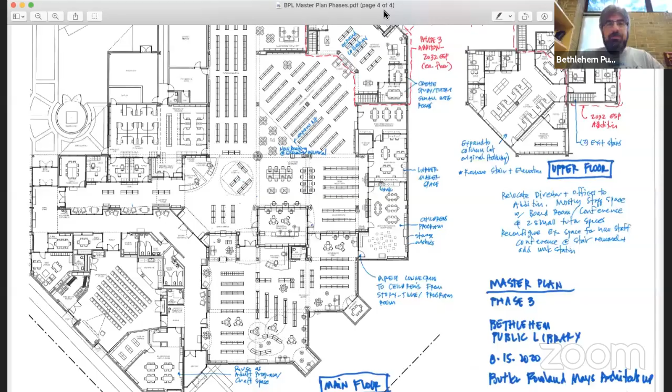Great, so Lisa's going to walk us through, and just briefly, I think you've had a chance to look at these for a few days, and probably had a sense of what they were even before that, because they're versions of where we were previously. But just very quickly, let's talk about the entry. This is the main floor, and we'll start with the sheet, which is the existing conditions.

Anything to say here, Paul? Oh, sorry, Michelle. I did have a question.

The scheme that we're looking at right now, this is the one with the minimal change. Is that correct? Well, phase one of this scheme is the minimal change.

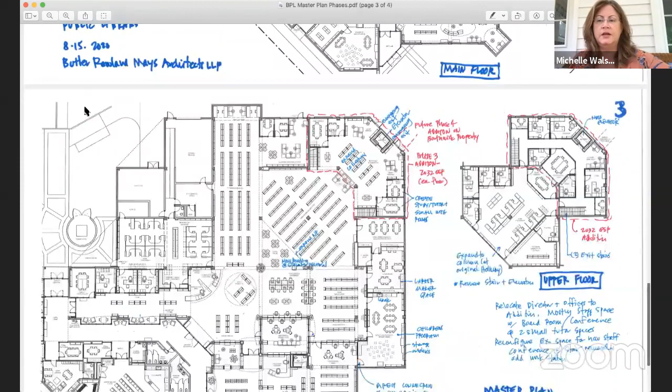That's right. Okay, I'm a little confused on what exactly we're looking at. Are we looking at scheme 1, scheme 2, scheme 3? I understand these are phases, but the end result is going to be which of the prior schemes we've discussed? What we've done is consolidated all the comments for all the prior schemes into one master plan that has multiple phases. So if you were doing an absolute minimal, we don't want to change the footprint, we just want to redo the inside, that's just phase one of this scheme.

Gotcha. Phase two, if you decide to do the addition, for example, that adds the meeting room, which is on your screen now, that's something you can do. So essentially, we've gotten away from disparate schemes into a single consolidated scheme that has multiple phases, and you can stop at any point along the way. We tried to make them so they were all self-sufficient. If you stop after phase one, which is minimal, phase two, which has an addition, phase three, which then gets the most extensive. Does that make sense to you?

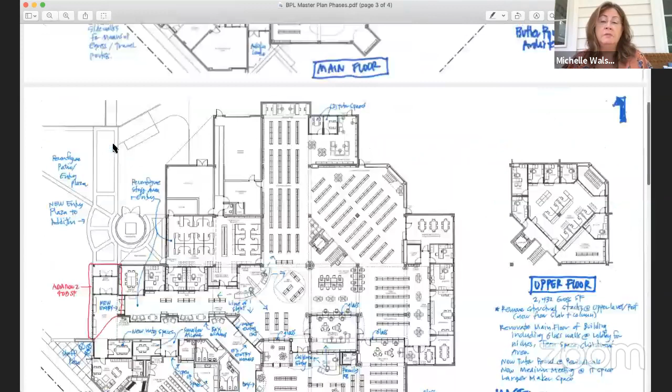Yes, it makes sense. I honestly just did not recall a discussion that we were going to move away from choosing between schemes 1, 2, 3, or 4 way back when. Maybe I missed a step in there, but yes, please continue.

Okay, sorry. These are certainly, we can still modify these if there are things from scheme 2 or 3 or something that you think should be brought back into this. We can see about doing that, but we tried to accommodate all the comments we were getting from those schemes individually to make a single consolidated scheme. But let's see how it works, and if it doesn't, we'll come back to it.

Okay, all right, thanks. So the existing conditions drawing. Anything to comment, please? The only thing that would happen is I started to show where some demolition would happen in order to accommodate the scheme.

So it's sort of minimal demo, except for the main gallery, the brick walls we're going to cut through so that you have a lot more visibility between the lobby space or the gallery space and the rest of the library. And then basically a 400 square foot addition here and 475, 474 addition here. So that's basically the start of phase one.

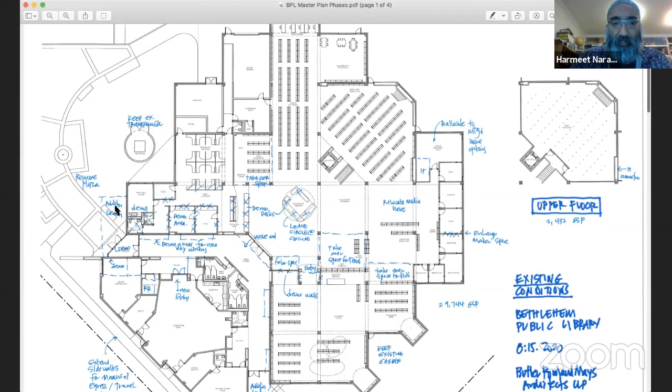Sure, yeah, in fact, when you see it here, we can extend that space here. You can see how we've adjusted the plaza for the straight on entry, and instead of entering here, we're now entering up here, but we could bring it even further. We could connect maybe even to the half round or something like that. But that's easy to do because it doesn't affect any other building systems. It's sort of discrete over on this side.

That was my assumption. Okay, we could do that as a pergola too. Instead of having it actually be built or enclosed space, it could still be covered further out.

Architecturally, a covered walkway that picks up the architecture of the building. You see that at schools a lot where they have bus drop-offs and things like that, where they need a long covered space. I'm not saying we want this to look like a school, but it's integrated into the architecture, not just a tarp strung over a walkway.

Okay, so this is phase one where there are minimal changes to the footprint. So the only changes in phase one are this addition and this little addition down here. So a few hundred square feet.

Originally, we were thinking about doing the upper level stuff, but we've pushed that off to phase three for reasons of scale. Phase one right now is essentially these two small additions that change the entry, and they could get a little larger if we wanted them to, but it's essentially rearranging the interior.

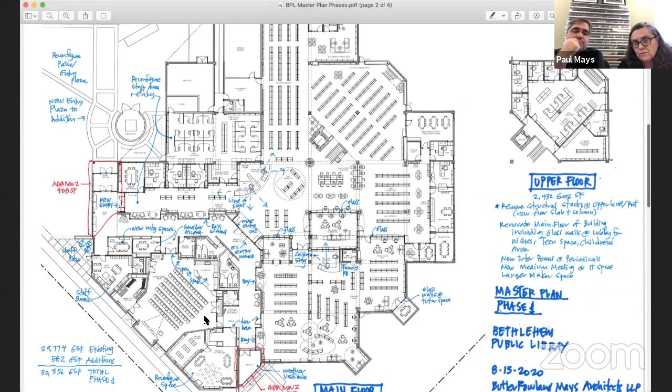And then there's a direct connection that we can have right now between the kids and the story room, or if they need to use the bigger room. When you get to phase three, I've taken over this space so that there is a direct connection between the kids and the story time activity room, and then this could just become an adult meeting room or activity space at that point.

Another one that can be - again, by keeping the gallery here, we keep going back and forth because we don't want to be redundant with space, but we do want a threshold between inside and outside the library proper. But everything outside has to have access to the restrooms and these various meeting rooms. What this means is you have a large meeting room, 2 conference rooms, theoretically even the staff lounge, and in the future this becomes an adult room. There's lots of options for meeting space going forward that don't involve violating the threshold to the library itself.

The other thing I wanted to add is separating the children's room is partly an acoustic question, but it's also a safety question, which we're seeing more and more. Obviously we're trying to address the spread of virus safety questions, but one of the other common questions is about protecting children who either wander off or are led off by, even if it's an adult they know, a non-custodial parent or things like that.

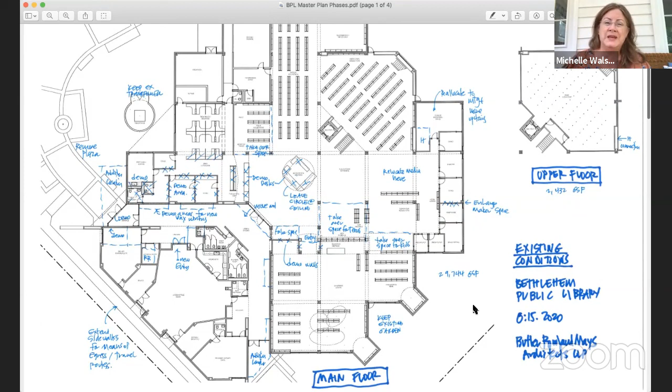Grocery stores were doing that kind of thing long before the pandemic, as far as driving up and receiving your packages to your vehicle. I think it's something the library could consider. I don't know how difficult it would be to draw up a scheme for that, or to add it in at this stage.

No, that wouldn't be too bad. It would involve a phase probably beyond the three we're talking about, but we could move that up in priority if that was something we wanted to do. We just did a drive-through at the Moffat Library in Washingtonville a year or two ago.

And right now, as you say, during the pandemic, they're saying thank goodness we stuck with it. It was a question of whether we wanted to do it or not. They're golden now when it comes to drive-through pickup because they're set up for it.

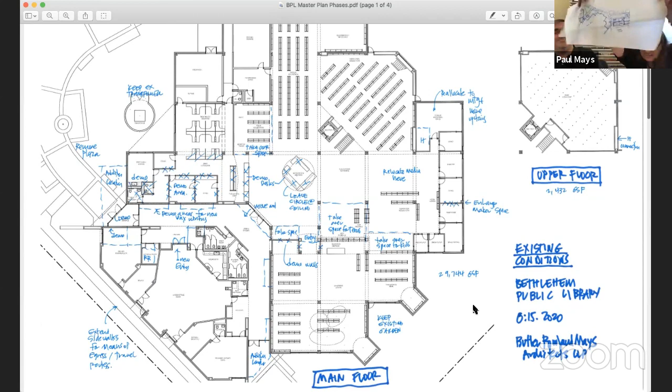But Lisa had started, I don't know if you can see, we started a little scheme of something that could happen on the site, or just straight parking. Because I know the county office across from you sort of steals your spaces, this would be a way for you guys to get more parking over there.

But we could definitely think about having a loop there, a drive-through loop. The trick is we have to loop it so that the left-hand driver's side of the car is on the building side. So it's counterintuitive to the way the rest of the site circulates at the moment, but we're rethinking a lot of that piece anyway.

So Michelle, it's an excellent point. If that's something we want to consider looking at, or as a priority going forward, now's the time to be thinking of it in the master plan and deciding where it makes sense to construct it. Yeah, no, it's a good thought. All right, thank you.

So coming back again, phase one is fairly straightforward. It does get expensive in the sense that it's a large building coming on a half century old, give or take, from the 1970s. So of course I'm a half century old now that I think about it, but having said that, there's a lot to do there.

So the other question mark, and we were just going through this at the Niagara Falls Public Library as well, the building itself isn't exactly built for flexibility because of all the masonry. If there were framed walls and sheetrock, moving things wouldn't be that big a deal. But the architecture of this building has big open spaces, which is great for flexibility, but whenever we want to punch a hole in a wall, it's likely a load-bearing masonry wall in most cases. So we've accommodated that in the numbers as we've looked at it.

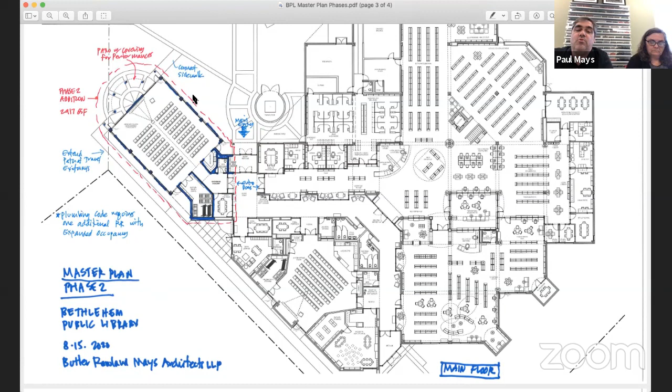Phase two, in its simplest terms, takes phase one, which is already done, and adds a new custom-built meeting room into that area we talked about. Michelle, you were mentioning, what about the earlier schemes?

This was the one, I think we were told that the children's room version we had in one of the schemes probably wasn't desirable. We looked at a few other things, but the one that was desirable was putting a new meeting space here. So that's what this shows.

So here's the entry, or if we extend it up here, here's the entry, whatever it is. But now we've gained this piece. This is relatively simple, and in fact most of this could happen while the library was open, because we can partition this piece off and do this construction without affecting the library itself.

Whereas with the phase one things we were talking about, you would either have to break it into components and work in an area, then work in another area, which we accommodated, but that drives up the expense. It would be easier if you could move out for a few months, but then you're talking temporary space and a cost for that.

But we did see, when the interior of the building was last renovated, there was a very interesting drawing that showed how you move from one space to the next to stay in the building. So it has been done before. We're doing it right now at Guilderland, literally moving the shelves around to make it all happen during construction.

Now, we're showing this as phase two because it's a discrete piece that can be broken out. On the other hand, if you combined phase one and phase two, you could construct this first and then have this as a swing space, essentially moving things into it as you renovate those areas.

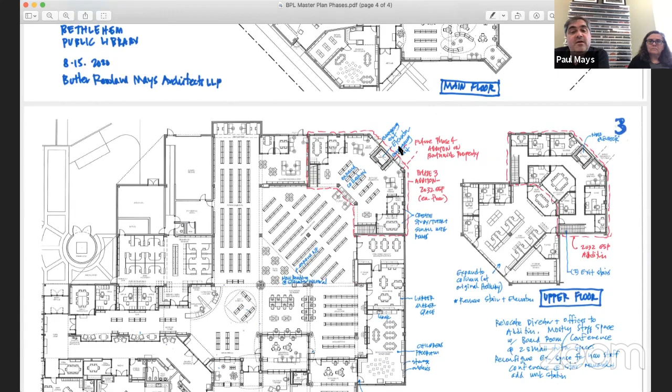Or even, as you were mentioning, the extension of some staff areas and a drive-through pickup and so forth out in this area - or that could be combined into this phase. But at the moment, we're just sort of looking at lots of different options.

But does this all make sense? I should stop there. Two questions: does this all make sense to you? And again, the phasing can be shifted as priorities are determined.

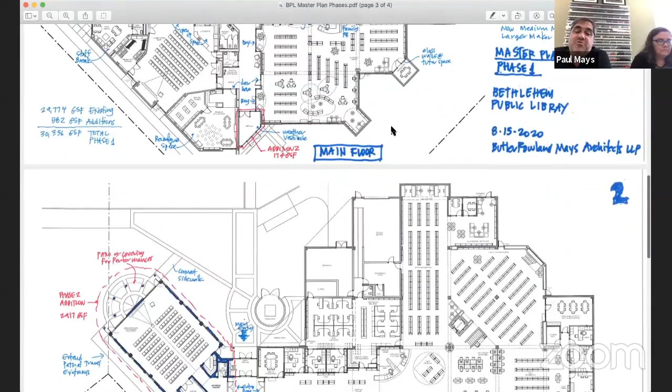But the second question is, is there anything from schemes 1 through 3 point whatever, or 4, that we looked at before that you say wait, we were going to do that and I don't see it anywhere here? I think we picked up most of the priorities and got rid of the things that we didn't like, like the children being out here. But you would be the best judge of that.

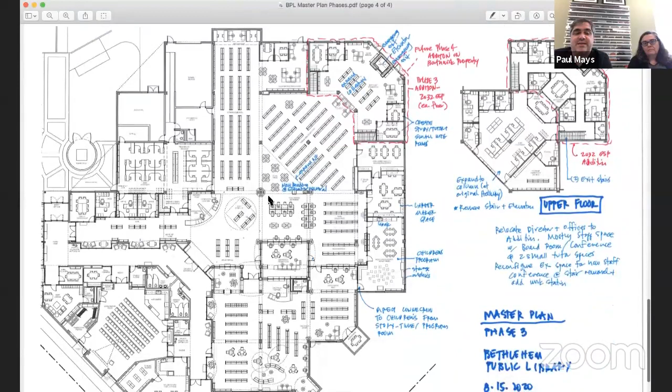Any thoughts? Well, I do notice on scheme 2, and I realize not everyone has this in front of them, but we do have a bump out - you called it addition 1, it looks like, at the very bottom of scheme 3 on your screen now. Down here, have those two little bump outs.

To the left of that, you had a small addition for the studio conference, book sale space is what it was called. Is that area another possibility for a small addition there? Yes, it is - but yes, absolutely.

We can do that. Our thinking was we had started to create so many other spaces, we didn't want to just go forever and keep creating more and more spaces. But that's an option either as part of one of these phases or as a future. Again, at the end of the master plan, we can still say we have future expansion here.

We have future expansion up here too, and opportunities there, in 10 years or whatever. There's still the possibility here to extend too. But the question of what can we do in just the footprint was sort of the catalyst to see if we could get most of what you needed within the footprint of your existing building.

Right, I think that original question was just because we hadn't seen what we could possibly do with the existing footprint, not that we were against those original plans that would extend the property. Well, certainly we can show dashed the creation of spaces where future additions could be. And if it's a priority, we could even start to think through the interiors of those and how they would expand the areas adjacent to them or what would go in them.

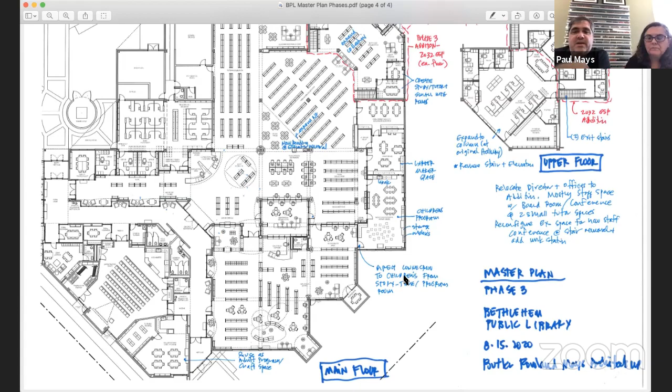Sometimes it's tough to tell if that phase 4 or 5 is going to be at least 10 or 20 years down the road. It can be an exercise in how far do you take it. We have space, we have the opportunity to do something there, but we also have time to think through what may happen with library technology and usage. Certainly the things we're doing now with study rooms, tutor space, and extra meeting spaces are different than they were 10, 20 years ago. So we have the opportunity to roll with things if we know we can expand into those areas later.

But your question, Michelle, is we did sort of a minimal solution here to get a better entrance from Delaware Ave. We could do that in phase 1, to make that some space we think is important to have in that location. Well, we say that, but you're going to see the numbers for the phases too, and there may be a point where you say, oh wait a minute, we have to make this a manageable number.

Of course, there's a lot of variables in play at the moment, and the master plan will try and delineate what all those are, prioritize, and give us a firm direction. I pointed out when we were talking early on, I showed you Kingston, which had like a 6-phase plan. We've rearranged them as we've gone along because different grants became available or a priority came up, so what was originally phase 2 got deferred and we put phase 3 in front of it, and actually did a phase 3.1 afterwards. So the master plan is flexible. There's lots of things we can change. And as you say, if we decide we really do need to add something here, that's easy to do. We know we have the room for it.

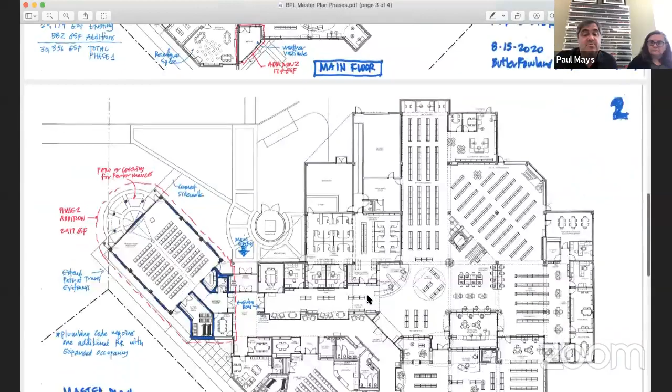Wasn't this a plaza or garden? Yeah, that's the garden, that's staying. So we took out the addition there because we knew that was something important to stay. But as we say, there are other opportunities to add those things back in. And we think this gets you up in terms of square footage—this probably puts us about where I would have expected at the end of phase 3, with still the opportunity to add thousands more square feet in the future.

Anything else you want to cover on this? We can come back to the plans. I see it's 10:44. Wanted to ask a question, yes, Lisa.

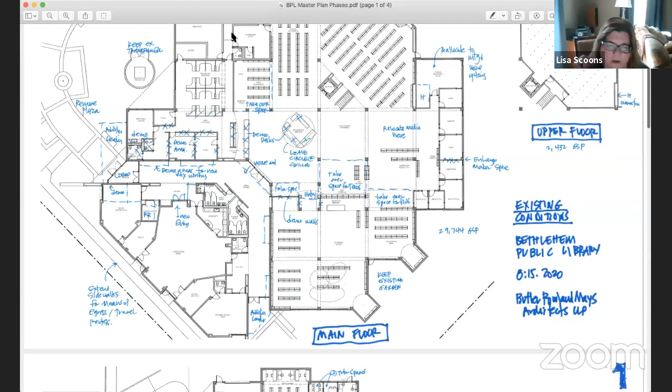About doors. We now would have 3 different entrances into the exterior, here and here. Is that a concern? Jeff, I'm kind of looking to you, because right now we have one... one entrance into the main part of the library. Oh, you only have 1? So we're definitely adding 1. There, but I'm exiting—yeah, this one's just an exit that you wouldn't enter into. We don't want people entering the children's room first.

I didn't mean to cut you off, Jeff. Sorry. No, this one is technically not an entry to the space. It would probably be an alarmed door, as a matter of fact, because it comes off children's. But this one is the existing one, and then we added one here, but both are within easy sight of the main desk.

But Jeff, I defer to you. Do you have thoughts on that? I probably did do some thinking about that before, I have some thoughts on that. Does that make sense? Sure.

Any other questions before we move on? I did have one more question. We had a tour of the library recently, and this question came up about essentially the two hallways we have going in near the main entrance. Yes, that one, and then behind, and this one.

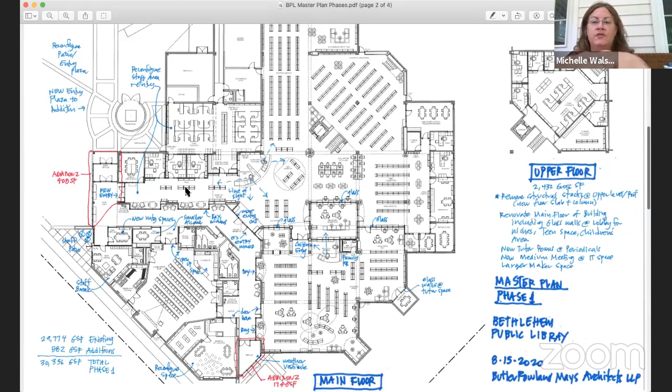I think the idea is to somehow keep the main library separate from this other meeting space area. Correct. But the conversation we had on our tour was there's actually never a time when we have meeting areas open when the library is not. So is there really a need to separate the two?

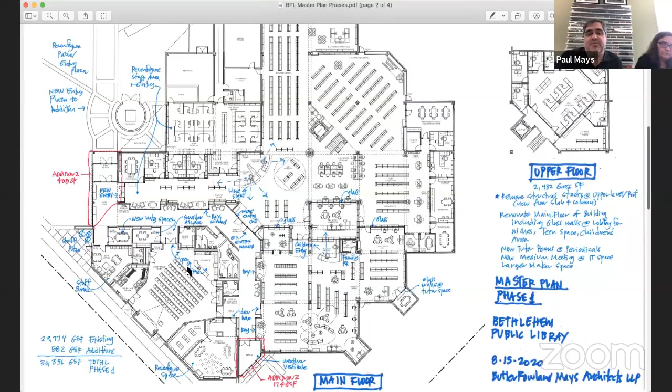I'm going to suggest this. At this phase, I would keep them separated because we want that decision to be a policy decision, not an architecture decision. In other words, you've decided the meeting room is never open unless the library is open. But you do have the option. If things change going forward, you could open one and not the other. I would suggest leaving them separated here, but in phase 2...

Now that you have the option to have this meeting space open, we could close this off here, depending on restroom access. That would be something we'd have to work out. Because right now we're relying on these restrooms, but then this whole thing could be part of the library proper, if that's what you're getting at, Michelle. Yeah, and at that point you'd still have a meeting room that could be separated because of where it is. We'd have to work out restrooms, but that's an opportunity maybe to then break this through, because this is all glass, we've already broken through the walls here.

That's a minimal change between phases 1 and 2. In other words, we put in these niches, but then they just become open. We take the glass out for the next phase, and now all of this is part of the main entry sequence of the library. That's a possibility, because your plumbing is all here and you have a slab on grade, getting plumbing over to these areas is going to mean trenching and so forth, so that's where some of the expense comes in. But that might make sense if you're really looking to get rid of the redundant corridor.

Right, okay, thank you. And I think I mentioned that at our last meeting, we'd like to make that one space, but for now it is important to keep the two separate from our perspective. If you decide as an institution, not just now but as far as we can see into the future, we don't plan on ever having meeting space available when the library is closed, then we can say all right, we'll go from that assumption, and the need for this separation goes away, because then these restrooms are always accessible.

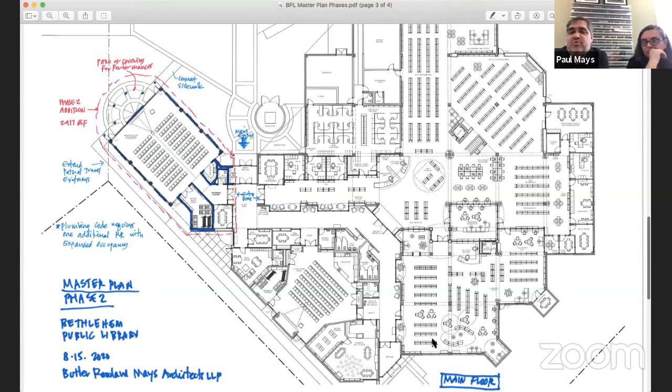Not perfectly, right? So I'm going to stop sharing this screen for a moment, if I could, and go to... bear with me. Occupancy, lineal footage. The lineal footage, very quickly, you'll see in the summary, I think these were sent to you already, right? Yes, I sent them. Oh, am I sharing this? I'm not sharing it yet. Share screen, you have the right one.

Do you have any highlights or thoughts on anything that changed? Did you have a chance to look at that, Jeff? I did. Collections and so forth.

Did you have concerns? Not yet. I would want to look at it. I think I like the space that's gained up in the hall, the new hallway up front. There's certainly more than you lose in nonfiction, but it's different shelving. So it would definitely be -- well, not definitely. I think my impression is that it would be a drop in the amount of nonfiction shelving available, and we would have to figure that out or accommodate that.